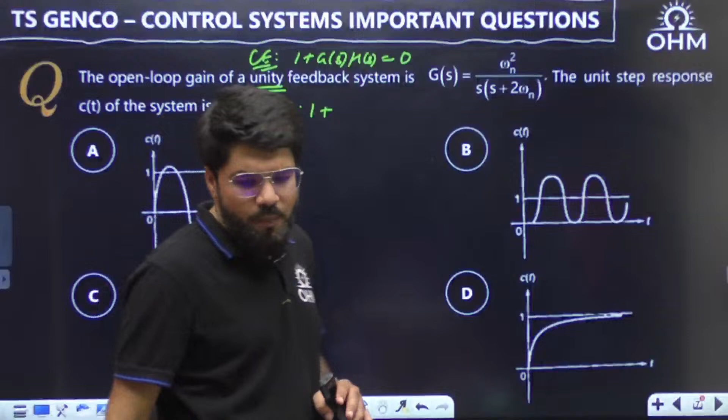G(s)H(s) is known as the open loop gain. So 1 plus G(s)H(s), G(s) is given to you, and H(s) is 1 because it is mentioned as unity feedback. Solving, I will be writing it as s square plus 2 omega n s plus omega n square. And when you compare with the standard equation, s square plus 2 zeta omega n s plus omega n square, everything else is in the same place. So by comparing with the standard form, the value of zeta is zeta equal to 1.

For zeta equal to 1, what type of response does the system have? The response is non-oscillatory and critically damped. For zeta equal to 1 and greater than 1, in both cases it is non-oscillatory, and zeta equal to 1 represents critically damped, where the system reaches equilibrium as quickly as possible. Correct answer is D. The type of response in B corresponds to zeta equal to 0. This is undamped. This one is negatively damped.

So A and C are for negative zeta. I will mention it for your revision. Option C will be the case when zeta is less than -1. When zeta is between -1 and 0, the type of response you obtain is A. B is for zeta equal to 0, the undamped case. And zeta between 0 and 1 is the underdamped case. So the correct answer for this question is option D, corresponding to critically damped, zeta equal to 1.

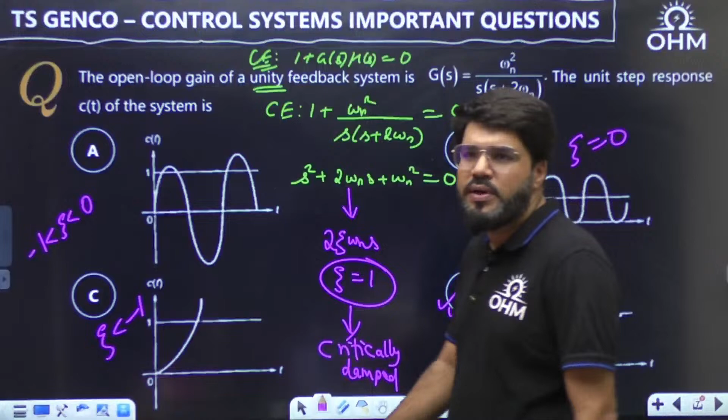Let's be ready for the next question. Two unity feedback systems A and B with open loop transfer functions GA and GB are given. Which of the following statements is correct? It's about comparing which has higher or lower overshoot, and which has lower, higher or equal settling time. So it is a comparison of two parameters, overshoot and settling time. Let us revise the important points here.

For the previous question, many of you, like Durga Prasad, Ashok, Arvind, Rajendra, came up with the answer D.

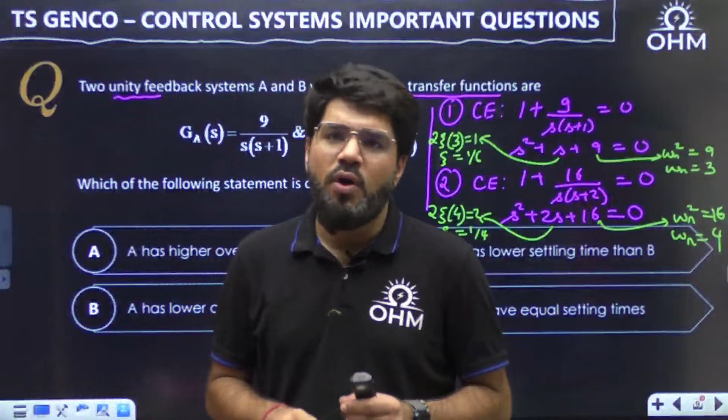So, dekho, now if I compare both, for the first one, zeta is 1 by 6, omega n is 3. And for the second one, zeta is 1 by 4, correct? And omega n is 4. Now, overshoot. What is the relation of overshoot with zeta that you should know?

If I write down the overshoot formula, it is given by e power minus pi cot phi into 100 if I write in percentage, or this is also written as e power minus pi zeta upon under root 1 minus zeta square into 100. Now dear, you should not use the formula to calculate overshoot, but you should remember that with increasing zeta, this overshoot decreases. If zeta is higher, overshoot is lower.

So now for which of the systems is zeta higher? Definitely 1 by 4 is higher than 1 by 6. Zeta 2 is greater than zeta 1, and hence I can say that the overshoot for the second system will be lesser than that of the first system. So second ka less, first is having higher overshoot. So A has higher overshoot, option number A correct. Definitely then others should not be correct, but still let us check.

What about the settling time? Now dear, what is the settling time formula? Settling time is given by 4 by zeta omega n for underdamped system. Both of the systems are underdamped. So settling time is 4 by zeta omega n for underdamped systems, correct? So now for the first one, what is the settling time? Do I need to calculate, or let us only compare zeta into omega n?

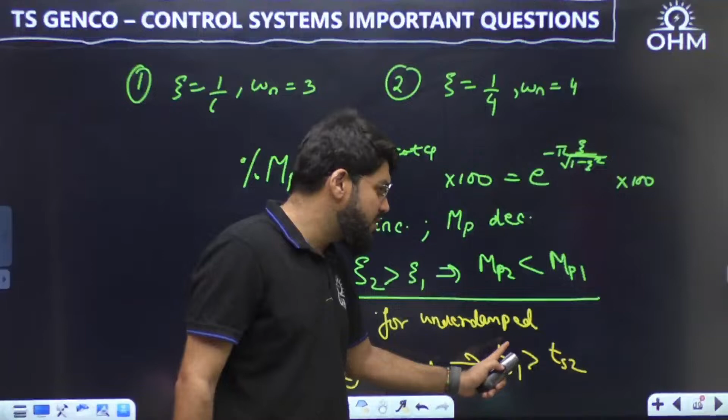So whose settling time is higher? First zeta omega n is low, so settling time for the first one will be higher than that of the second one. Zeta omega n is in the denominator, na? Wherever zeta omega n is lower, the settling time will be higher. So the first system has higher settling time, not lower, and they don't have equal. So that is why C and D are the wrong answers.

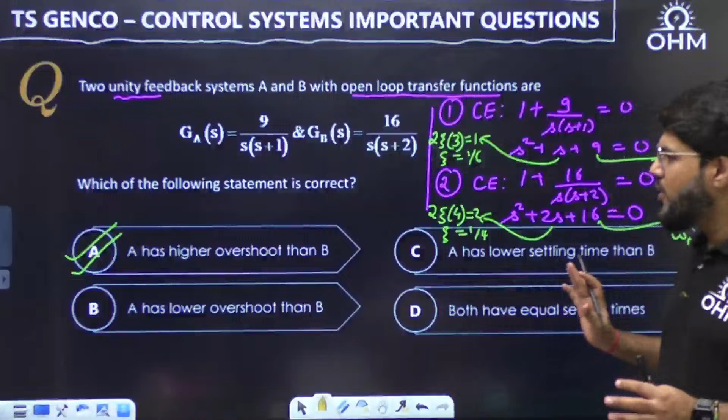Everybody okay with this calculation? Yes, Prabhavati also says answer A. Correct. Answer number A. Anyways, these are MCQ questions only in Genco, so any one option correct. So we got A correct, but still I have cross-verified the settling time also. Clear everybody?

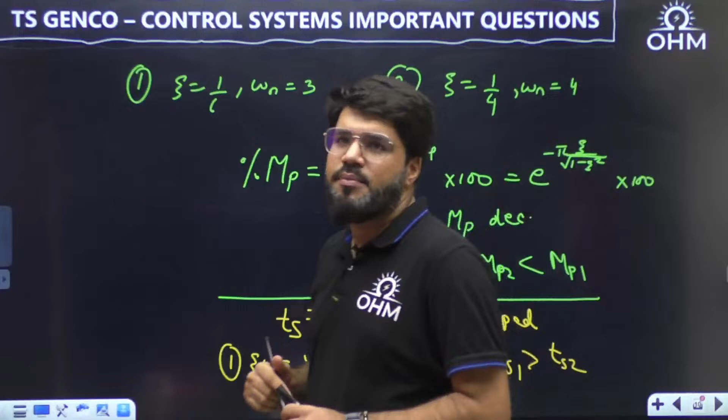Settling time is 4 by zeta omega n for underdamped, and both are underdamped because zeta is less than 1, for any zeta between 0 to 1. This is the settling time formula.

Correct. Next question, dear. A second order system with a 0 at -2 has its poles at -3 plus j4, -3 minus j4 in the s plane. The undamped natural frequency and the damping factor of the system respectively are... Sorry guys, this is not damping factor, this has to be damping ratio. Please correct this question. It has to be the damping ratio.

So let's check it out. Now see, second order poles. The poles are in general given by the formula minus alpha plus minus j omega d, or minus zeta omega n plus minus j omega n under root 1 minus zeta square. We know that zeta is the damping ratio and omega n is the undamped natural frequency.

This term alpha, which is zeta into omega n, is known as the damping factor, and this omega d is the damped frequency of oscillation.

Hi, good evening, Aruna. So Pratyusha says answer is D.

Let's check it out. Now a very simple comparison you can have. The poles given to you are -3 plus or minus j4. That means alpha, which is the product of zeta and omega n, is 3, and omega d, which is omega n under root 1 minus zeta square, is given as 4. Two equations and two variables, so you can find both values, but you can do something even more easily.

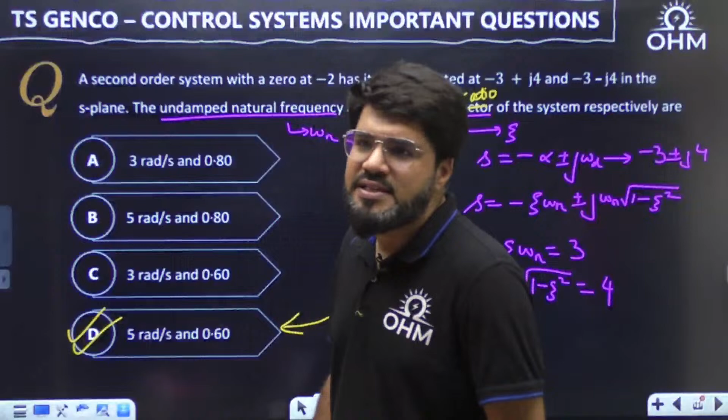Correct, Himanshu. Lal Kumar and Ashok said B. No, just check it out, it is D only. 5 into 0.6 will be 3. So only option D satisfies, and hence there is no need to check the exact values of zeta and omega n; although you can find them, it's not required. Hope this approach is clear to you.

Next one. Consider the open loop transfer function 5s plus 1 upon s square, s plus 5, s plus 12. Correct, Ashok Kumar. Find the steady state error due to unit parabolic input. So what is the type of the system? It should be unity feedback, so let's consider unity feedback with 5s plus 1 upon s square, s plus 5, s plus 12.

This corresponds to type 2 because of s square, the number of poles of G(s) at origin for a unity feedback system. Whenever the system is type 2, what are the standard results? Whether it is type 0, type 1, or type 2, all standard results must be known to you.

For type 2, the steady state error for step input is 0. For ramp input, again 0. For parabolic input, it is a non-zero finite value given by 1 upon Ka, where Ka is known as the acceleration error coefficient.

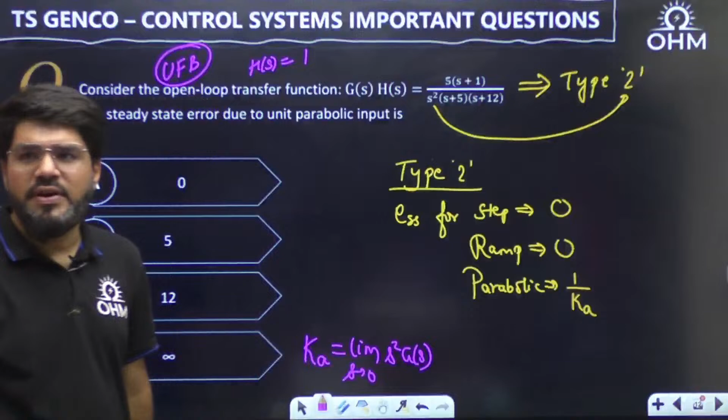Now what is the value of Ka? Ka is given by the limit of s tending to 0 of s square G(s), for unity feedback, taking H(s) equal to 1. So this is limit s tending to 0 of s square into G(s), and I will place the value of G(s), 5s plus 1 divided by s square, s plus 5, s plus 12.

Okay, so s square cancel. Now put s tending to 0. So this is 5 into 1 upon 5 into 12, that is 1 by 12. So what is the steady state error? Reciprocal of this, and reciprocal of this will be equal to 12. Answer is C. Okay, so yes, correct answer.

Himanshu, Ashok, Lal Kumar, Pratyusha, Anil Kumar, Monica, Sushma, Hari. Okay, so all being interactive. Yes, guys, be interactive and keep solving. It is almost your end game, your end stage of preparation going on, and this is really the time where you should be active in solving enough number of questions, undoubtedly. Just a second. Yeah.

Correct. So let's move ahead to the next question. A unity feedback system. What is given to you? G(s) is K(s + 2) upon s(s + 4)(s + 9). What is the value of K to yield 10% error in the steady state? Now let me specify some more things in the question, which is even more obvious. See, what is the type of the system given to you? This time it is type 1, s power 1.

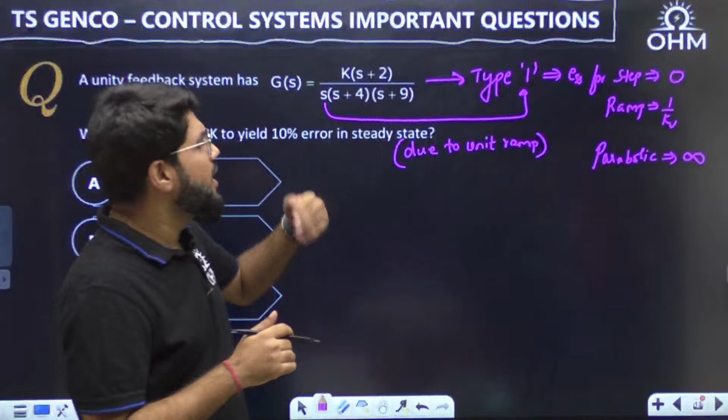So there is a 10% error, finite error given in steady state. So this has to be due to unit ramp input. Otherwise, the answer would be either 0 or infinity. It will only give a finite non-zero error for unit ramp input, otherwise not. So of course, we'll take it as unit ramp input.

So now, the steady state error is 10%, that is 0.1. And steady state error, as I mentioned, is 1 upon Kv, which is 0.1, and hence Kv has to be 10. Further, what is Kv? Kv is given by limit of s tending to 0, s into G(s). Correct, guys? That is the value of Kv.

What is the G(s) given to me? K(s + 2) divided by s(s + 4)(s + 9). So s cancelled and this becomes K, then s tending to 0, so into 2, by 4 and 9. Overall it is turning out to be K by 18. So if I solve this separately here, see what is given to me. Steady state error is 0.1 and that is 1 upon Kv.

Sorry, already I have written this calculation, let us directly use Kv. Kv is 10, and Kv is K by 18. So what is K? 180. What is the value of K? 180. Correct answer is option number B.

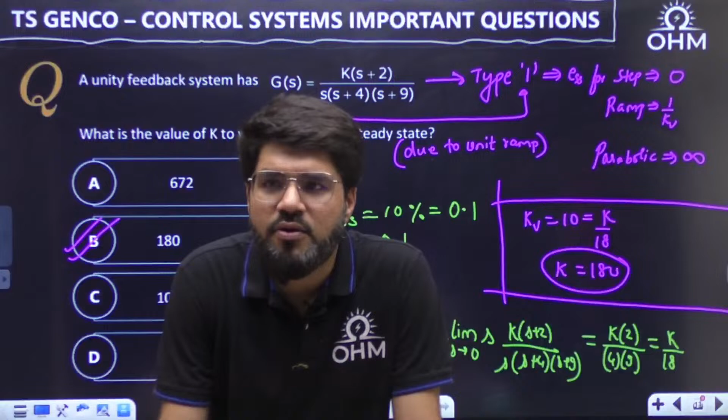Yes, correct answer Himanshu, Pratyusha, Hari, Lal Kumar, Ashok, Prabhavati, Mohan. All right. Option number B is the correct one.

Let's get moving ahead to the next question. Here it is. Which one of the following statements is correct for the open loop transfer function?

Which one of the following statements is correct for the open loop transfer function G(s) = K(s+3)/(s(s-1)) for K greater than 1? Okay, K is given to be greater than 1. Open loop system stable, closed loop system unstable. So the options are checking what? Open loop stable or closed loop stable, both stable, both unstable. What is the story here?

Okay, so the open loop transfer function is already given to you, G(s). Of course, H(s) is 1. If the open loop transfer function is only G(s), then H(s) is 1. Now, what is that open loop transfer function? K(s+3)/(s(s-1)). And what are the open loop poles? You should always remember OLP, I call it open loop poles. What are open loop poles? Poles of the open loop transfer function.

The poles of the open loop transfer function are 0 and 1. That is just obtained from the denominator. And very clearly one of the open loop poles is in the RHP. For any transfer function, if there is a pole in the RHP, that represents an unstable transfer function. So definitely the open loop is unstable. Now, what about closed loop? Write down the closed loop transfer function or the characteristic equation, any one of them.

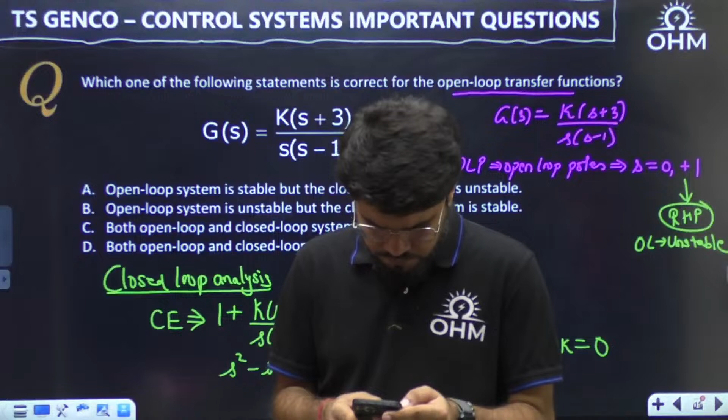Now, it is a second order characteristic equation. Think, do we need to go to Routh-Hurwitz, or can we say something directly? Just a moment. Do we need to go to Routh-Hurwitz? Come on, tell me. Just a moment. Yeah, let's come back. So do we need to go for Routh-Hurwitz?

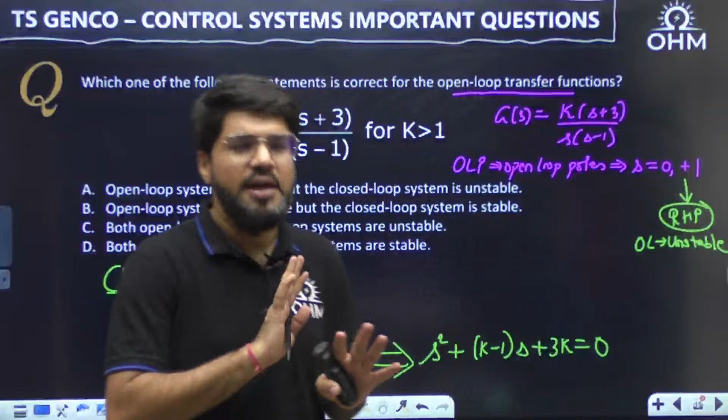No. Yes, very good, guys. We don't need Routh-Hurwitz. If it was higher order, third or fourth, we can go for Routh-Hurwitz. Even for third order cubic we have shortcuts, but generally for higher order we need Routh-Hurwitz. Here, only coefficient signs are important. For a second order system, if all coefficients of the characteristic equation are of the same sign, then the system is stable. Now, what is the sign of K-1? Given K greater than 1, this factor K-1 is definitely positive.

So this coefficient is 1, K-1 is also positive. K greater than 1 means K is positive, so 3K is also positive. All coefficients are of the same sign, and it is second order, so the system is stable. Because it is second order, no RH required. Hence the closed loop is stable, open loop unstable. The answer to be marked is option B.

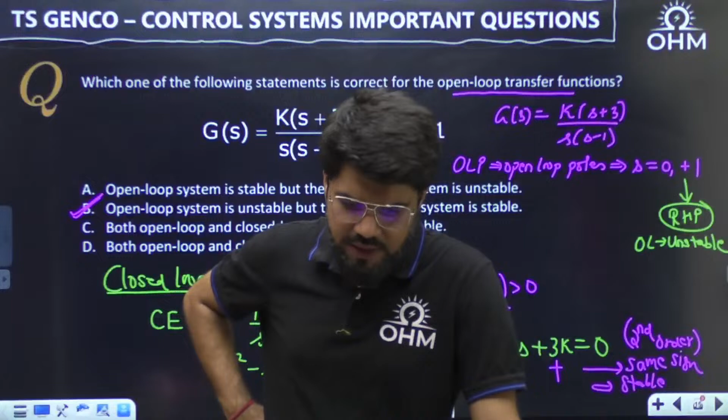Cool. Let's go to the next one. Here it is. The characteristic equation of a control system is given to you. Which of the following is one of the symmetric root pairs of the system? Symmetric, and that too pure imaginary roots. Now all of these options are pure imaginary in nature. How are we going to approach this question?

The characteristic equation is fourth order; of course you can't solve fourth order, even with a calculator. The options are given to you as pure imaginary pairs. Pure imaginary roots of a characteristic equation will only come due to the presence of an auxiliary equation, and an auxiliary equation can only come whenever the Routh array has a row of zeros, ROZ, which means row full of zeros. And this is what the auxiliary equation is.

Correct? This is what is the auxiliary equation. This is what is the auxiliary equation. Chalo. Okay, so some answers have started coming up. Himanshu and Hari say it is C.

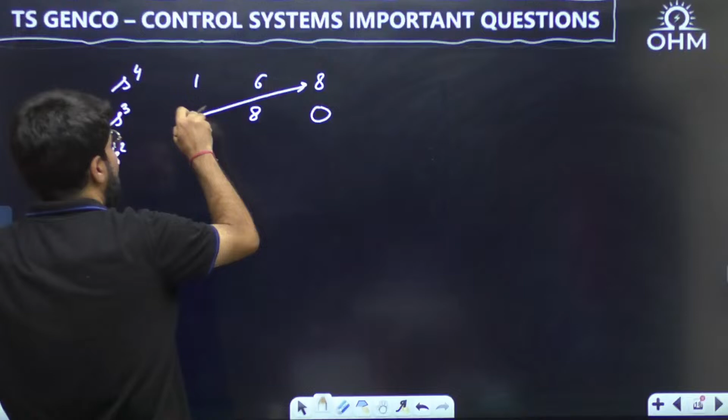So two rows are exactly identical, and that is why when you solve for the next row, yes, the row of 0 will definitely be coming, Rajiv. When you solve for the next row, see, 2 into 8 minus 2 into 8, definitely 0. The entire column is 0, so 2 into 0 minus 2 into 0, 100% 0. The last element of a row is always 0, and this is what I am telling you.

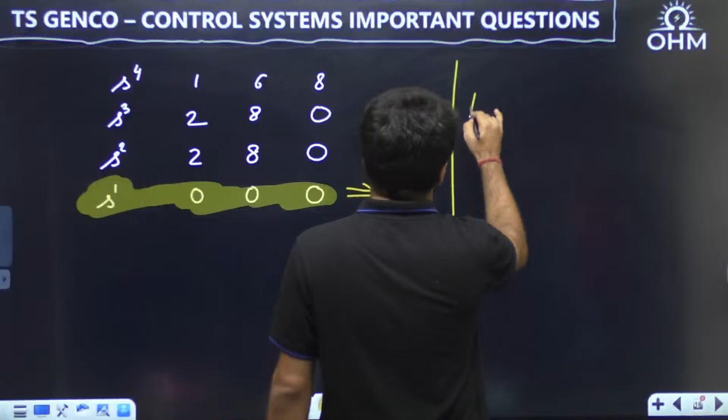This is what I am calling a row of zeros, correct? This is the row of zeros for me. Now whenever there is a row of 0, we will form the auxiliary equation. The auxiliary equation is formed from the row which is above the row of 0.

So that leads to which equation? The equation in the s square row, quadratic, with coefficient 2, and then the alternate coefficient, so 8 s power 0. If this is s square, the next term will be s power 0. So simply 2s square plus 8 equal to 0, or if I cancel 2, s square plus 4 equal to 0, s square will be minus 4 and s will be plus minus j2. This will be the imaginary pair. Plus minus j2, answer is C.

But let us continue and do some more analysis here. Answer is option C anyway. So yes, correct answers: some of you have given C, like Himanshu, Hari, Durga, Lal Kumar, Mohan, Vinela, Anil, Ashok. Correct, answer is option C.

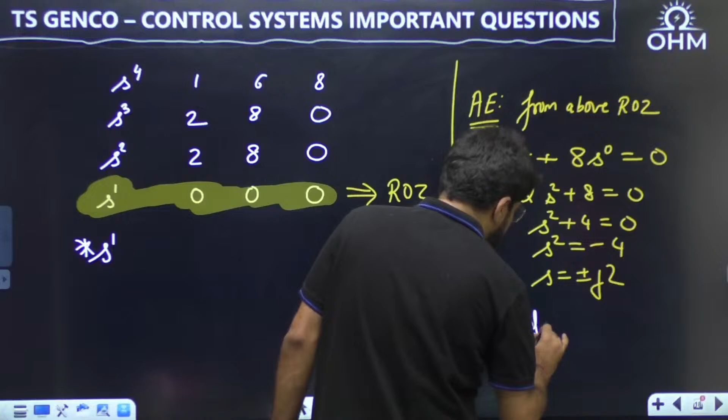But generally when we talk about stability analysis, we continue and complete the Routh array. So what do we write next? Next we write the modified s power 1 row. How do you write the modified s power 1 row? By taking the derivative of this auxiliary equation. When you take the derivative of this auxiliary equation, it becomes 4s equal to 0.

So what is the s power 1 row? What is the coefficient of s power 1? 4, and then 0, 0, no other coefficient. And then the last row, s power 0. When you are forming s power 0, which two rows will you use? The new modified s power 1 and the s power 2, of course. So this is 4 into 8 minus 0, divided by 4, it's going to be 8 here. The entire column is 0, so the answer is 0. Last element anyway 0, this is s power 0.

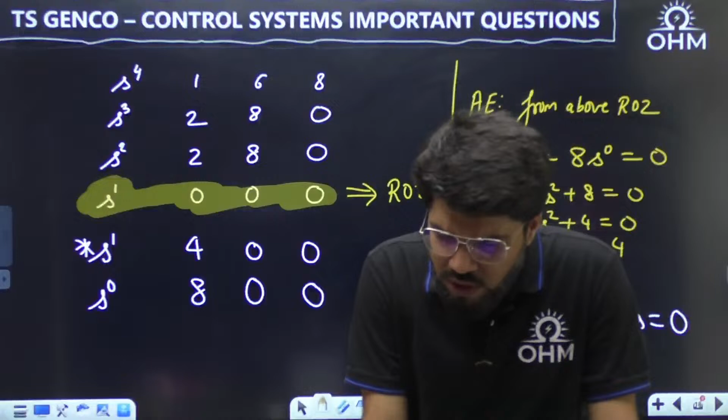So if I have to do the complete analysis, how many RHP roots, how many LHP roots, etc.? Let's quickly revise that also. Anyways, the answer is option C, plus minus j2. But how many RHP and how many LHP roots?

So see dear, there is no sign change in the first column. When I look into the first column, there is no sign change. That means there is no RHP root. So how many RHP roots? 0. Then how many LHP? For that, we know the j omega axis roots also.

By this auxiliary equation we have got that there are two roots on the j omega axis, plus minus j2. There is a complex conjugate pair here. So how many on the j omega axis? 2. So how many are left for LHP? There are total 4 roots, because it is a fourth order equation. Out of the 4, 0 on RHP, 2 on the j omega. So how many LHP? 2.

What is the comment on the stability of the system? If there is even one RHP root, the system will be unstable. But there are no RHP roots. Still the system is not stable, because it has a pair on the j omega axis, which makes it marginally stable. For it to be purely stable, all roots must be in LHP. If there is a pair on the imaginary axis, that makes it marginally stable, and if there is even a single RHP root, the system is unstable. So the system is marginally stable.

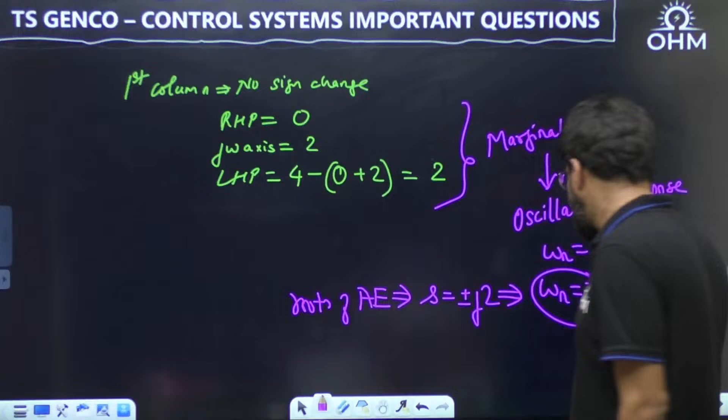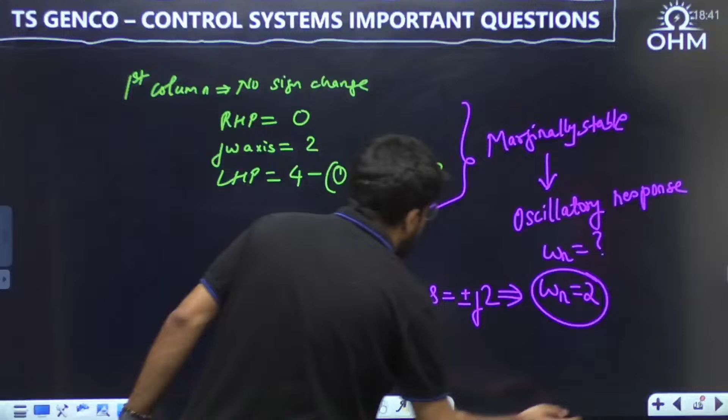Clear? Also, please take a note. Be very careful. Here you got RHP 0, j omega 2, LHP 2, and I called the system marginally stable. But suppose there was one sign change. Then RHP 1, j omega 2, so LHP is 1. Rest everything remains the same, but let us assume you got one RHP root.

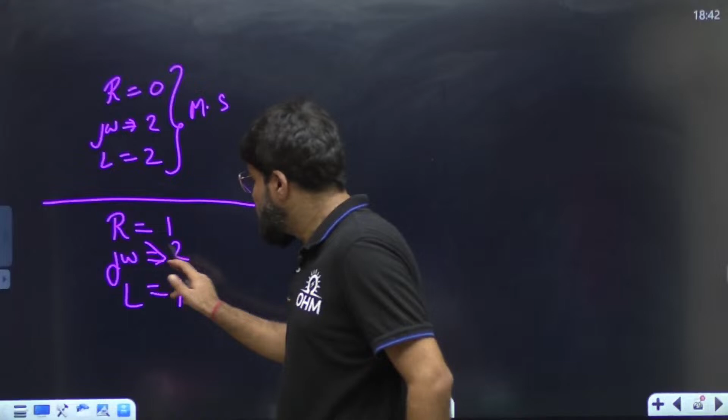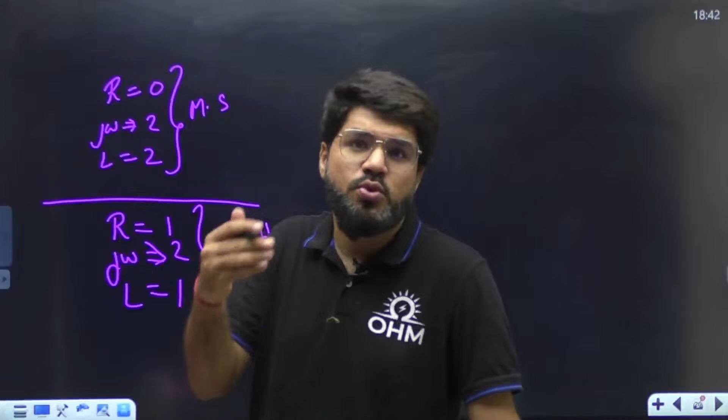If you had one RHP root and still two j omega roots, still a pair of imaginary roots, will the system be still oscillatory? Will it be still marginally stable? No. Even with a single RHP root, the system is clearly unstable. So please don't talk about any frequency of oscillation here. Frequency of oscillation is associated with an oscillatory or marginally stable system, and for that you should have a single pair of j omega roots with nothing in the RHP.

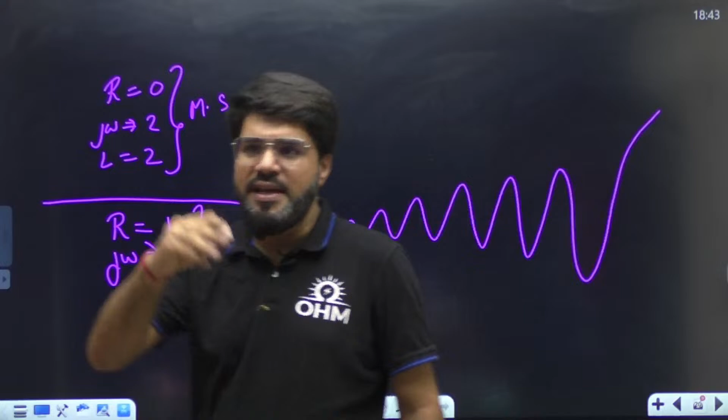If there is one RHP root, it is unstable. The response is negatively damped. The output will not only oscillate but will keep on increasing, and it will become unbounded after a certain point of time. So that is how it is going to be.

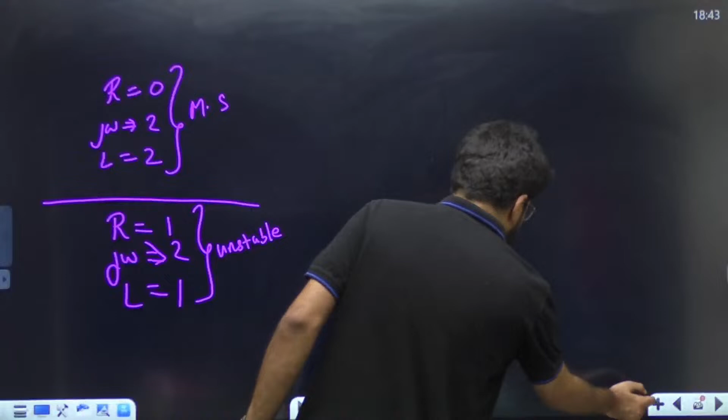You can even follow this shortcut for the auxiliary equation. There is one more way, dear. Suppose I have the auxiliary equation and I have the characteristic equation. What is the order of both?

Okay, what is the order of both? See, always remember one shortcut. Do you need to solve this auxiliary equation every time to find its roots? Not required. No, it's not actually required to solve it every time. Here it was solvable, and here I needed to solve it because I needed to find the roots. They were asking about the imaginary roots only, that complex pair, that imaginary pair.

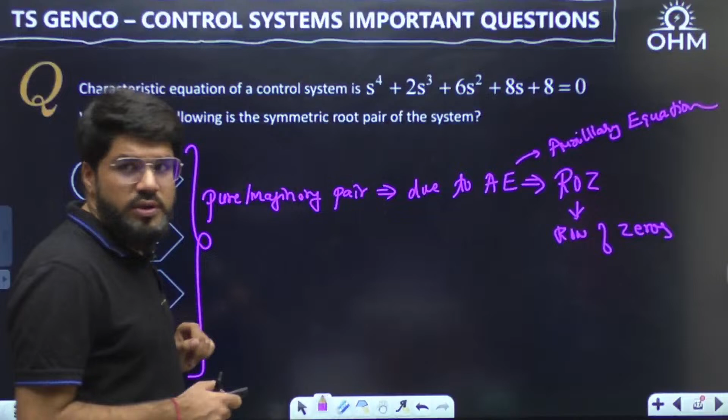But if I only want to comment on how many LHP, how many RHP or how many j omega roots, it's not necessary to solve the auxiliary equation. What you can do is just write down the order of the auxiliary equation. Here it is second order, and the overall characteristic equation is fourth order. Now, what is the shortcut for the auxiliary equation?

The shortcut is that for any auxiliary equation, because it contains only even powers, the number of RHP roots is equal to the number of LHP roots, which is equal to the number of sign changes below the auxiliary equation. For any auxiliary equation the roots are symmetric; the number of LHP and RHP roots are equal.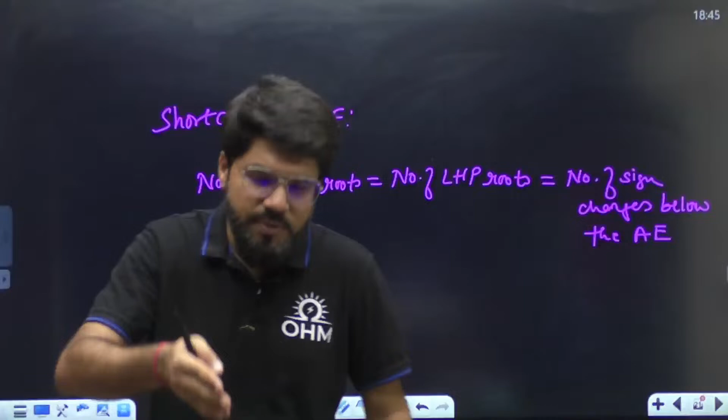And how many RHP roots? The RHP roots are represented by the number of sign changes in the first column, but below the auxiliary equation, because I am focusing only on the RHP roots of the auxiliary equation. So where is my auxiliary equation? Here. It starts with the S square term. I don't have to bother about anything above, because I'm only interested in the roots of this auxiliary equation, which starts with the quadratic.

So 2s square plus 8 equal to 0. How many sign changes below it? 0. So how many RHP roots and how many LHP roots? They are always equal, and both of them are 0 here. The auxiliary equation order is 2, with 0 in the RHP and 0 in the LHP. Nothing on the right, nothing on the left, so both roots are on the j omega axis.

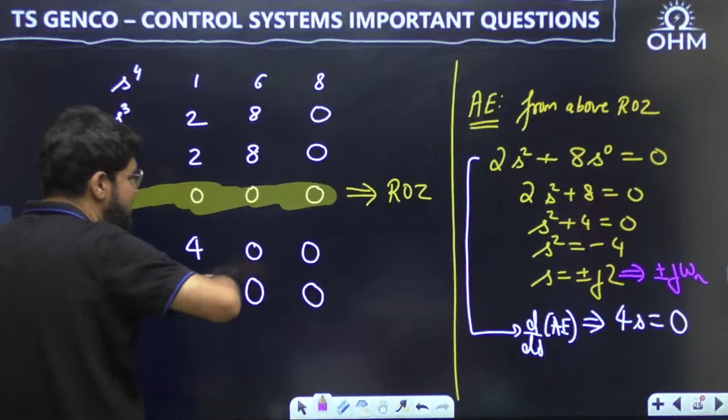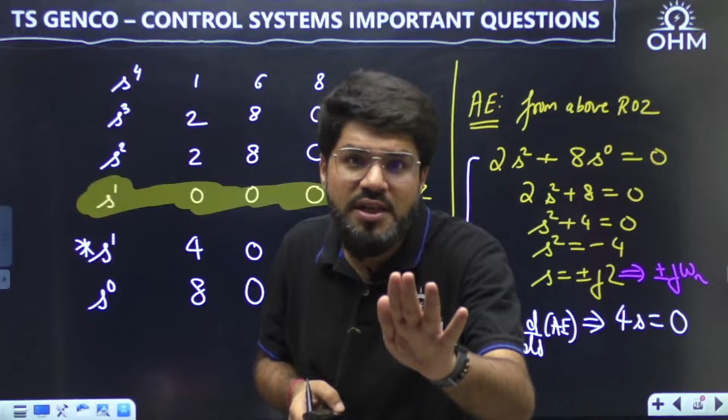Now coming to the characteristic equation, how many RHP roots? For that you have to see the number of sign changes in the entire first column. The number of RHP roots is always given by the sign changes in the first column. For the overall characteristic equation, take the overall sign changes. If you want the RHP roots only for the auxiliary equation, just look below the part where the auxiliary equation started.

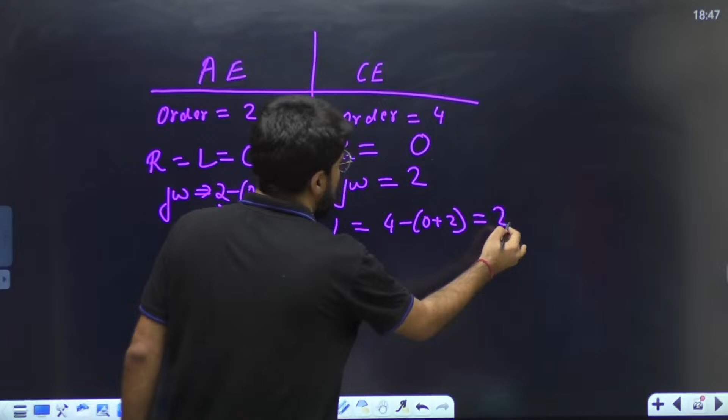So here, how many RHP roots? Even overall, there are no RHP roots. How many j omega? That is always decided by the auxiliary equation part, so 2. How many LHP? That is 4 minus (0 plus 2), which is 2. So here you don't need to solve the auxiliary equation. The shortcut: the number of RHP roots and LHP roots of the auxiliary equation will be equal.

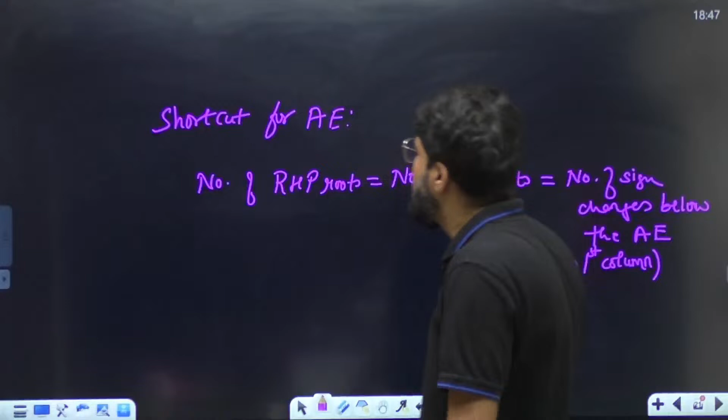Let me tell you one more important point; with this question, let us revise some important points. Whenever a row of zeros comes in any characteristic equation when you are solving through Routh-Hurwitz, there are definitely the following possibilities of the roots. There are three possibilities, and I will tell you all three.

Number one scenario, when the roots are pure imaginary, that is seen in the previous question. Number two, roots are real, of the form plus x minus x, equal magnitude but opposite sign. This is of the form plus jy minus jy: roots are complex conjugate lying on the imaginary axis, that is a pure imaginary pair. This is plus minus x. Next possibility is a quadrature, of the form x plus jy, x minus jy, minus x plus jy, and minus x minus jy.

All the roots are always symmetric with respect to origin. Plus y above, minus y below. Minus x left, plus x right, equal distance. Even if you calculate the distance of all these four with respect to origin, it will be the same, under root x square plus y square. Whenever there is a row of 0, the roots of the auxiliary equation are symmetric with respect to origin.

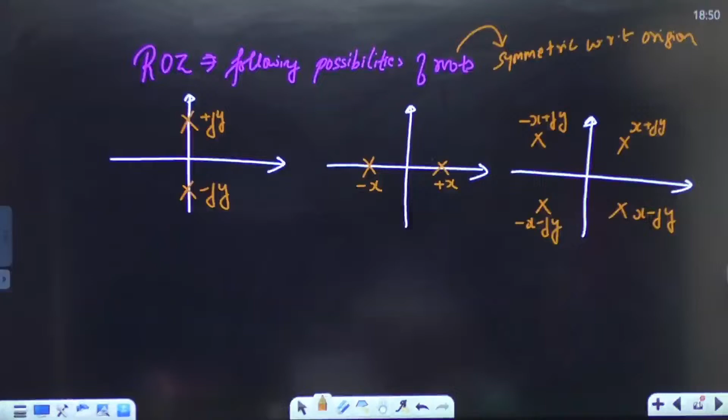Next question. The characteristic polynomial of a feedback control system is given: S cube plus KS square plus 9S plus 18. When the system is marginally stable, what is the frequency of sustained oscillation? This time you are given a cubic characteristic equation. What is the shortcut for a cubic characteristic equation? When you have the characteristic equation of the format AS cube plus BS square plus CS plus D, cubic is an important and repeated question, so you should know it directly.

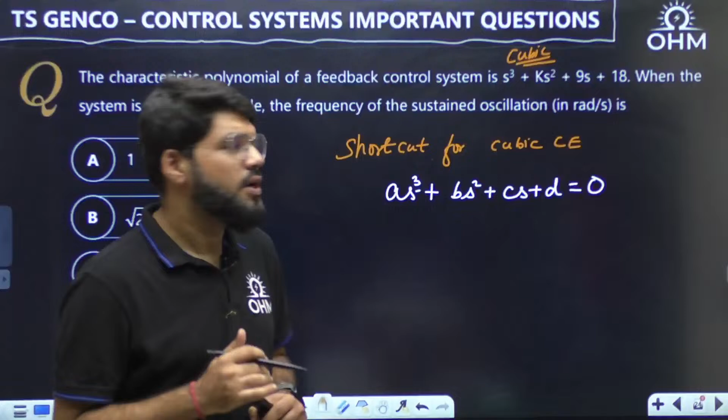In around 2 to 3 months, exact cannot be said, but around 2 to 3 months this much time will be there, Ashok.

So AS cube plus BS square plus CS plus D. Now what is the condition for the system to be marginally stable? When I'm telling a shortcut, it is actually coming from RH only. It is a simple one. A and C, alternate coefficients, and B and D here. Then S power 1: you will write BC minus AD divided by B, last element 0. S power 0: X into D by X, so you'll be left with D.

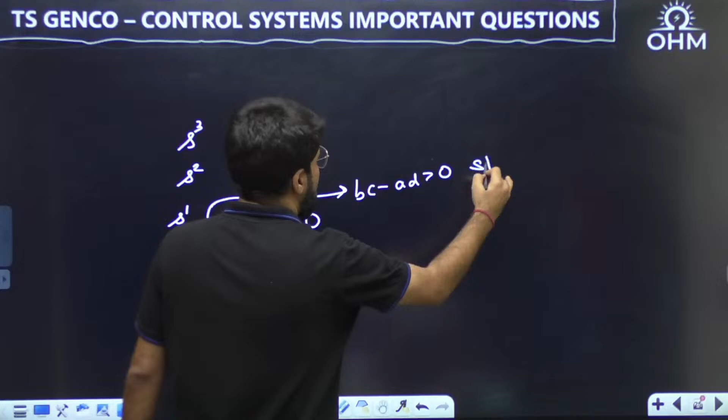Of course I'm assuming all coefficients A, B, C, D are positive, that is the necessary condition. What else has to be positive for stability? BC minus AD must be positive for stability, because if this is positive, all coefficients are of the same sign, no sign change, no RHP root. That is what will be required for stability: BC minus AD, inner terms and outer terms.

When BC is greater than AD, the system is stable. When BC is equal to AD, the system will become marginally stable, because you will have this term 0, a row of 0, and the marginally stable condition will come. And when BC is less than AD, a sign change will come. Sign change means RHP roots will come and the system is unstable.

So this product BC and AD will matter here. We call BC the product of inner terms or product of means, and A into D the product of outer terms or product of extremes.

Yes, definitely another session is coming up for signals and systems also, in the next one, Anil, definitely.

So this is BC and this one is AD. Chalo, cool. Let's move ahead to the next. This is BC and this one is the AD.

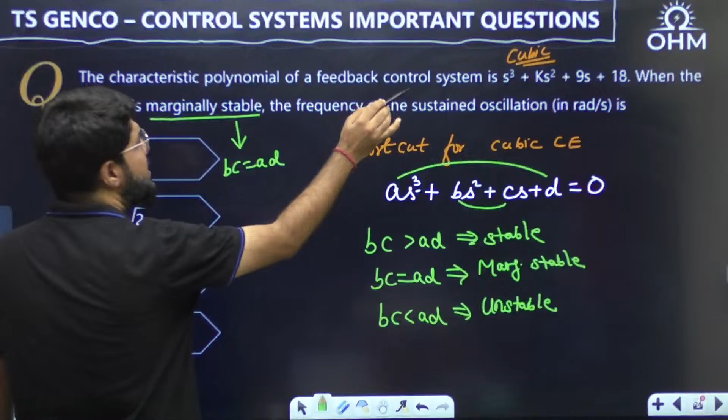Let's move ahead. Okay, so for this question, what is the condition? When the system is marginally stable, we need BC equal to AD. What is BC here? 9 into K. And what is AD here? AD here is 1 into 18, that is 18. So for K equal to 2, system is marginally stable.

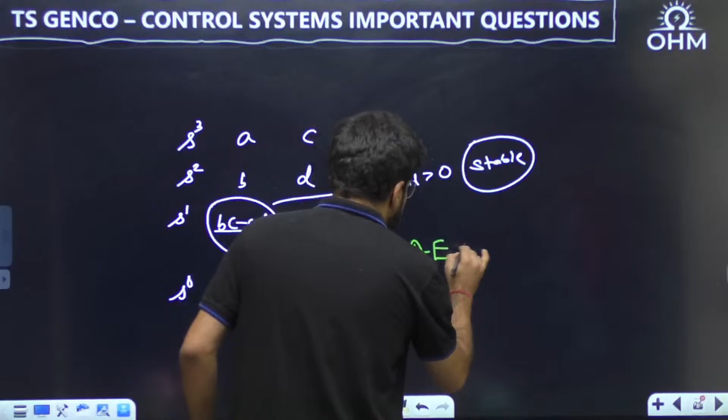But I don't want the value of K, I want the frequency of oscillation. Marginally stable means system is oscillatory. So what is the condition for marginally stable? BC is equal to AD. Now what is the auxiliary equation? See, how to write down the auxiliary equation by the shortcut first. So dekhna yahan pe please.

Marginally stable system leads to oscillatory system. And oscillatory system means it will have some auxiliary equation. Auxiliary equation is always an even polynomial. It starts from s square or s power 4 like that. Here s power 4 is not possible, so it will start with s square only. So it will be Bs square, and every auxiliary equation can contain only even powers. So s square and then D s power 0, the constant term.

So for a marginally stable system, how do you write down the auxiliary equation? One way is you write down the Routh-Hurwitz, but without the Routh-Hurwitz, be logical. Auxiliary equation always starts in an even polynomial, s square or s power 4. Here s square is possible. The coefficient of s square is B, and only alternate terms come up, so Bs square plus D equal to 0. So the auxiliary equation here is Ks square plus 18 equal to 0.

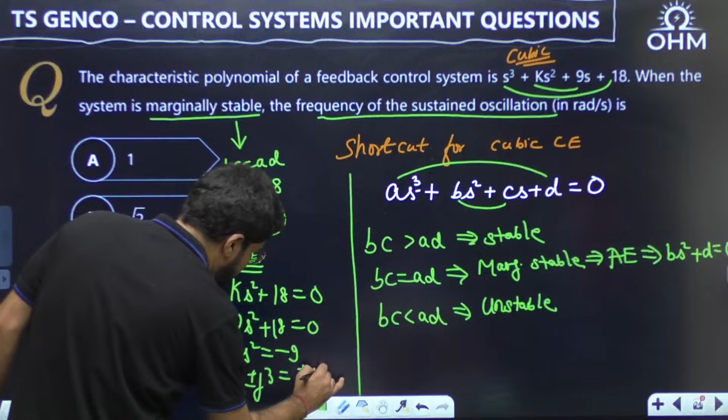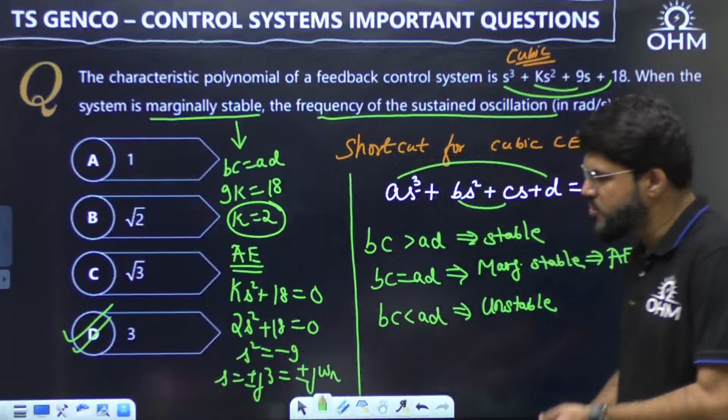What is the value of K? K is 2 now. So 2s square plus 18 is 0. S square will be minus 9, and s equal to plus minus j3. And that is plus minus j omega n. So what is the frequency of oscillation? It is equal to 3. Correct answer is D. Very good. The very correct answer is option number D.

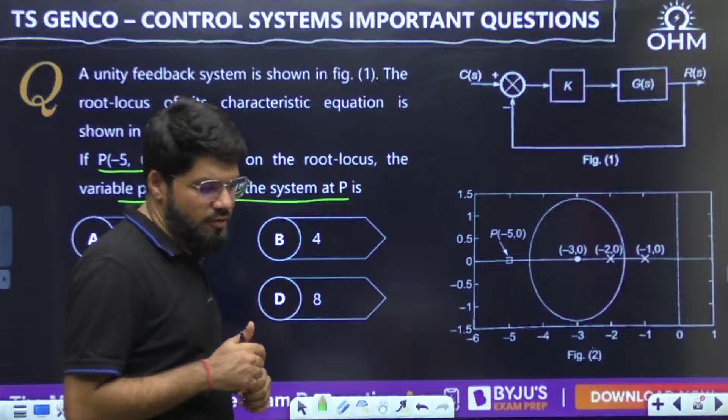When P is a point on the root locus, every point lying on the root locus must satisfy the characteristic equation, and the root locus is given to you. So from the root locus, what can you do? Number one, you can find out the characteristic equation and satisfy P, or the other way around. There are two ways of finding the value of K. Listen to me. Method number one.

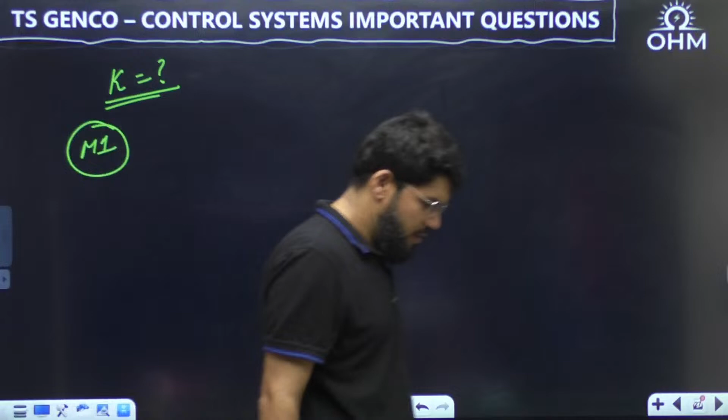Every point lying on the root locus should satisfy the characteristic equation. So can you find out the characteristic equation of the system from here? For the characteristic equation, definitely I need G(s)H(s). So can we find G(s)H(s) from here? Please see. And then I will tell you method number 2, which is even more straightforward. Just allow me a minute, dear.

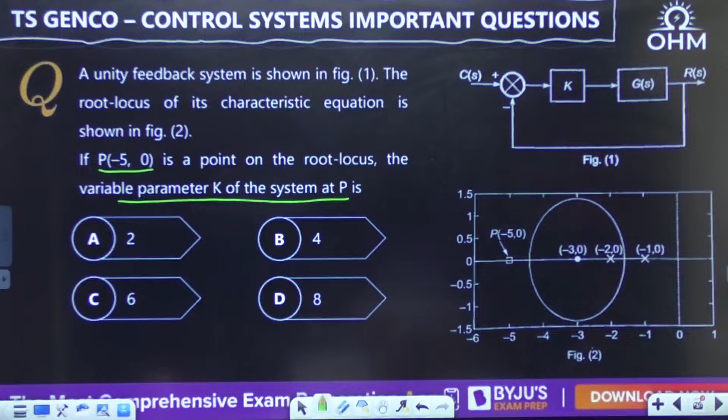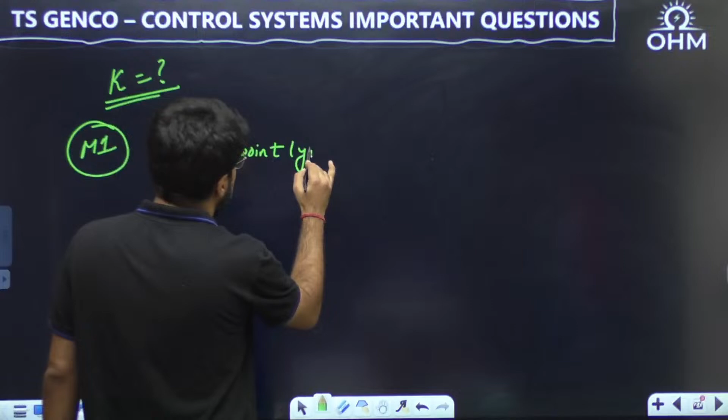Yes. So can we find the characteristic equation? For that I need the G(s)H(s). Okay. So what is method number 1? Method number 1 is: every point which is lying on the root locus must satisfy the characteristic equation. That is 1 plus G(s)H(s) equal to 0.

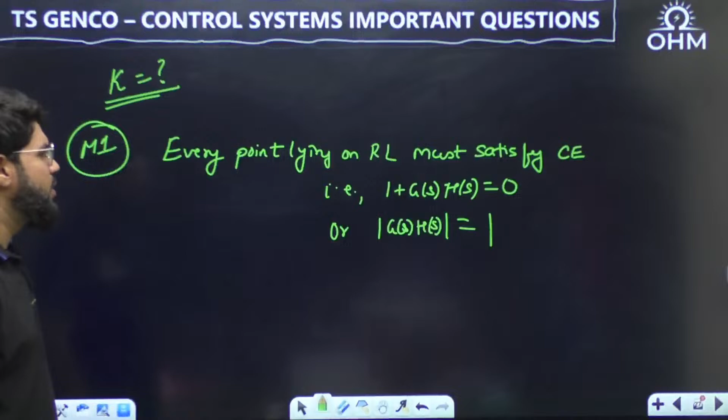1 plus G(s)H(s) equal to 0, or we can also solve by the magnitude condition. Mod G(s)H(s) equal to 1. G(s)H(s) equal to minus 1, so you can also find it by the magnitude. So mod G(s)H(s) equal to 1, and G(s)H(s) here can be found easily, because there is a zero given to you, and there are two poles of the system given to you. This is the zero, this is a pole, this is a pole.

So what is the G(s)H(s) here? It will be equal to some k into the zero. The zero is at minus 3, so I will write down s plus 3 in the numerator. And poles are at minus 2 and minus 1, so in the denominator I will write s plus 1, s plus 3.

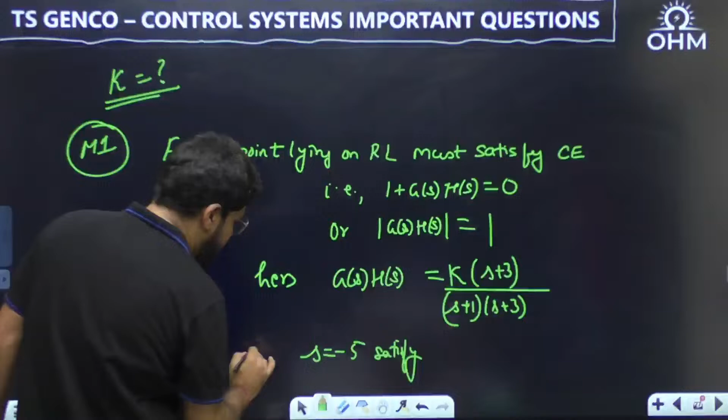Okay, so mod G(s)H(s) equal to 1. Or directly 1 plus G(s)H(s) equal to 0. Satisfy the point P here. What is the point P? Minus 5 comma 0. So s is equal to minus 5, because that is the point P. Put s equal to minus 5 and 1 plus G(s)H(s) should be 0. That is one way; now you can complete the calculation. Second way, simple, direct, I will tell you.

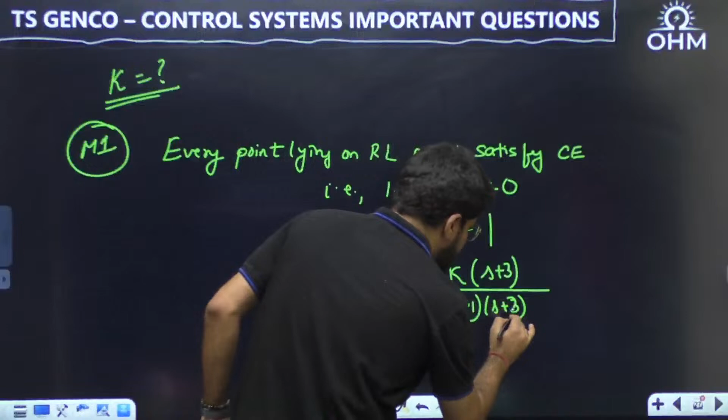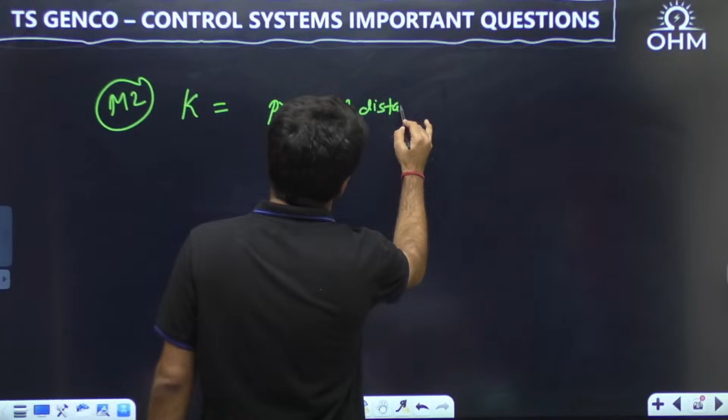Second method. K, by the product formula, is obtained from this only, mod G(s)H(s) equal to 1, or 1 plus G(s)H(s) equal to 0. And sorry, that is s plus 2, typo error, this is 2. The zero was at 3. Now listen to me. The next method: k is also given by the product of distances of the point P. I am talking about some point P. The product of distances of the point P from what?

From all the poles, divided by, and this is a direct method especially when the pole-zero diagram is known to you, the product of distances of the point P from all the zeros. Correct. Product of distances of the point P from all the poles divided by product of distances of the point P from all the zeros. Correct, everybody? So if I have to follow this, then what is the value of k?

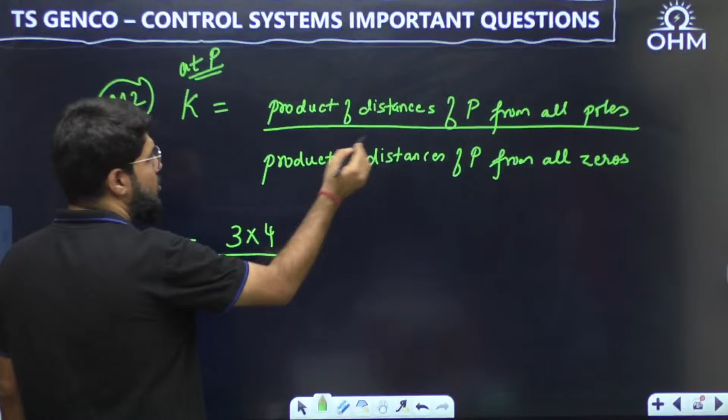So this is the point P. Product of distances with respect to all the poles. Minus 5 and minus 2, the distance is 3. Note down, this distance is 3. Distance with respect to the other pole will be equal to 4. And distance with respect to the zero, minus 5 to minus 3, distance is 2. So 3 into 4, product of distances from poles, divided by product of distances from zeros; there is only one zero and the distance is 2. And hence this answer has to be 6. Everybody okay? The answer has to be 6.

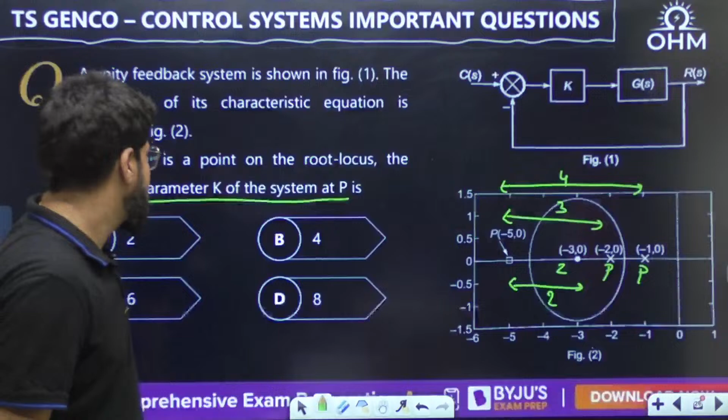So if you know that second technique, you can directly tick mark here. Just look into the geometry. This is my point. Distance from pole 3, distance from another pole 4, so 3 into 4. Now the denominator, distance with the zero is 2, so divide by 2. That's it. Very simple. It becomes an observation question then.

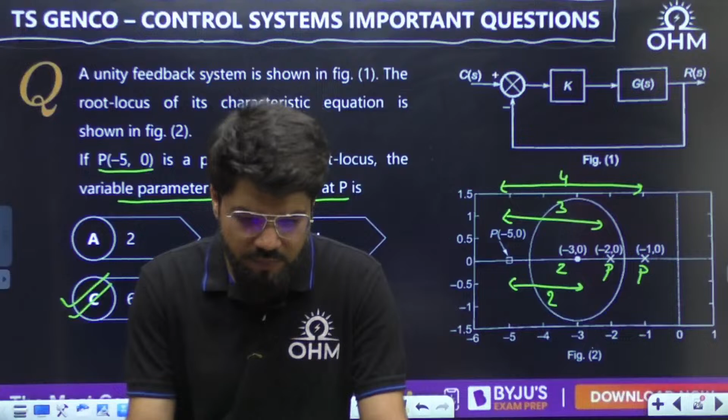Yeah, definitely. Many questions are straight questions, memory based or theoretical or simple numericals, like this also, provided your practice is always good. This is a question which can be solved easily within 1 minute. So up to this level is what is expected. Of course, very few questions can be good also. Be ready for that. Good means not tough, but at least something better than this. That is also a possibility.

Okay, dear. Chalo. Next one. Let's move ahead to the next one.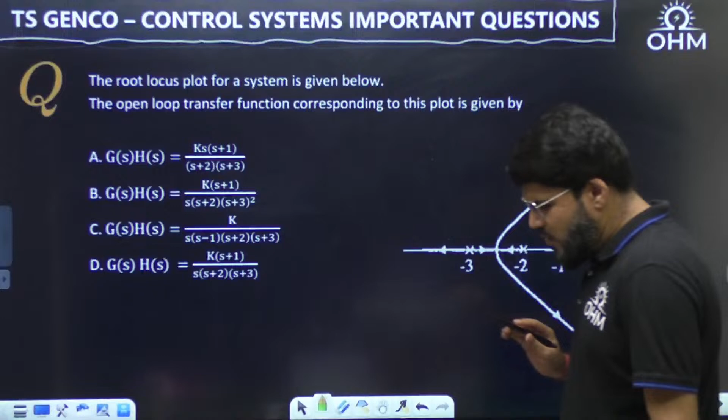So this is only a basic analysis of the poles and zeros, with a simple twist in the question. Have a look into this. Let me highlight the poles and zeros more clearly, maybe it's not that visible. -3 represents a pole location, -2 represents a pole location, -1 is a zero location, and the origin is a pole location. Now just see what can be the possible answer.

So see dear, definitely the answer will have to contain a zero at -1, so the factor is s plus 1. Then there is a pole at origin, so an s term. Then there is a pole at -2, there has to be an s plus 2 term. There has to be a pole at -3, so there has to be an s plus 3 term.

But when you look into the root locus, dear, is this the correct answer? See the arrows. Root locus is existing on both the sides of this particular pole. What is the odd number criteria of root locus? Something you must know.

As per the odd number criteria, root locus will exist on the section of real axis where the forward poles and zeros, I in short call it FPZ, is an odd number. FPZ, forward poles and zeros: poles and zeros when you see to the right, forward.

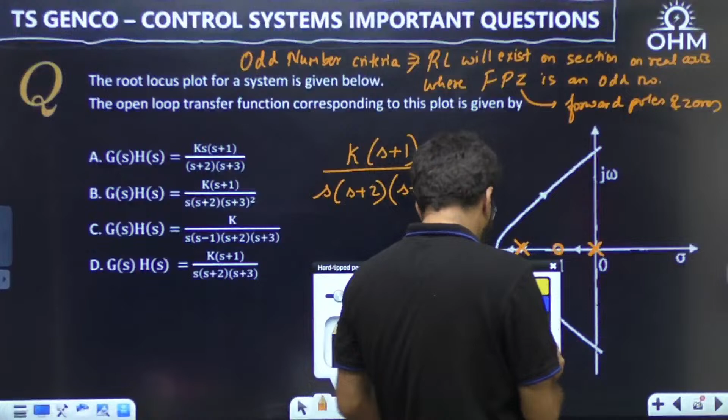So now please see here. When I see the forward poles and zeros on this section, how many? I have one pole. One is an odd number, so root locus is defined here. That is why there is a root locus between 0 and -1. If I see the forward poles and zeros here, there are no poles and zeros, nil, and that is counted as an even number. That is why there is no root locus branch lying here.

Similarly, there is no root locus, no bold line, no arrow here, because when I see to the right, there are 2 poles and zeros. 2 is an even number, so root locus cannot exist on the real axis here. Between -2 and -3 there is a root locus given, starting from -3 and -2, then there is a breakaway condition, etc. How many poles and zeros here? 1, 2, 3. 3 is an odd number, that is why root locus is defined here.

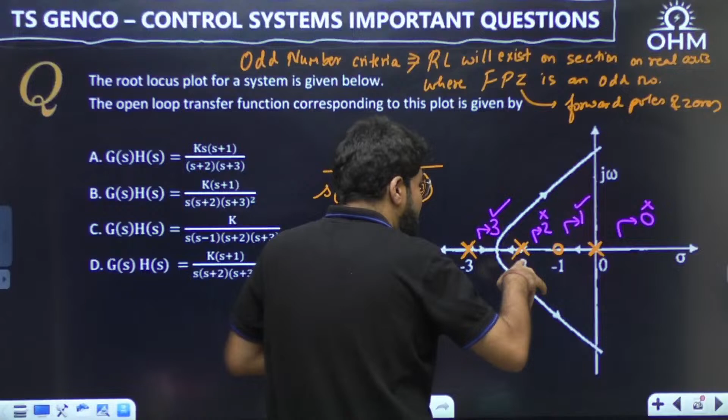Then, when I see the forward poles and zeros from here: 1, 2, 3, 4. These are equal to 4 in number. 4 is an even number, so root locus should not exist here, but root locus is still existing here. It looks like a simple question. You can say the answer is D, but it is not D, because here also root locus is existing and it cannot exist for an even number.

That simply means this also must be an odd number, and at -3 there has to be a double pole, 2 poles at the same location, so that 1, 2, 3, 4, 5 becomes an odd number. Hence our expression should have an (s+3) whole square term. The correct answer is option number B. Done?

So sometimes there can be small twists, and you should be ready for handling those small twists.

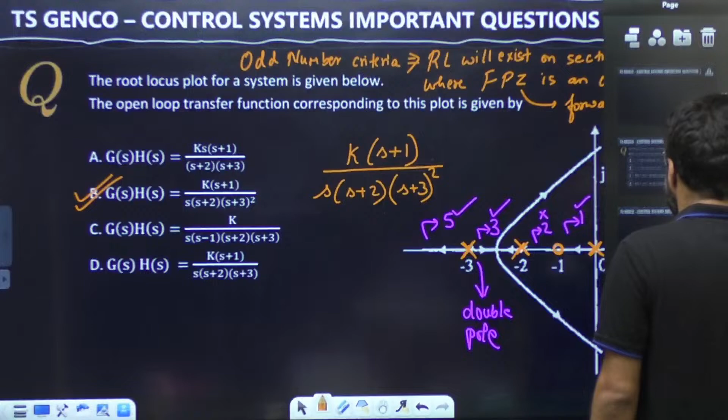Okay, now first take up this question. The transfer functions of two compensators are given below: 10(s + 1)/(s + 10) and (s + 10)/10(s + 1). Which of the statements is correct? Which is lead, which is lag? Very simple analysis.

The transfer function in which there is zero dominance is a lead compensator. The transfer function in which there is pole dominance is a lag compensator. So for C1, what is the pole and zero? Let me write down the zero here: -1. And what about the pole? -10.

So which is dominant? Zero is dominant. The dominant term is the one which is closer to the origin. So this is known as zero dominant, and hence this one will be a lead compensator.

Now coming to C2. What is the zero term? s + 10 = 0, so s is -10. And what is the pole term? s + 1 = 0, so s = -1. Here, which is dominant? Here the pole is closer to the origin. Zero is away, pole is closer, so this is pole dominant.

Very simple way of identifying lead and lag. This one is having pole dominance and hence is a lag compensator. Okay, so lead and lag.

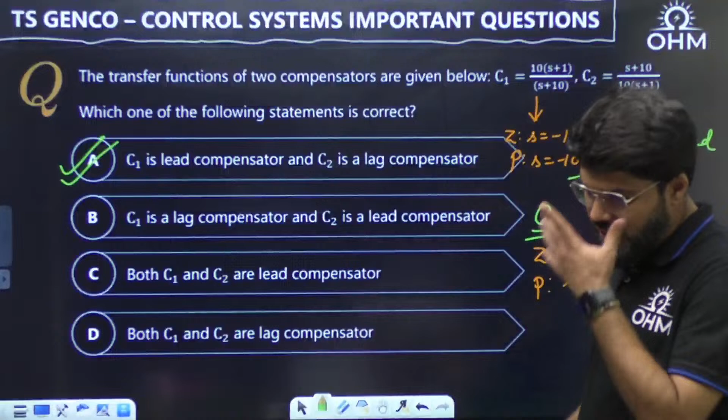Chalo, let's move ahead to the next question. Now a lead compensator is given to you: (1 + 0.12s)/(1 + 0.04s) can provide a maximum phase shift of? If you relate the pole and zero, of course it is going to be zero dominant. No need to check, they have mentioned it is a lead compensator.

We can also write the transfer function of a lead compensator in the standard format as (1 + sT)/(1 + sαT), where the zero is at -1/T and the pole is at -1/αT. So this is the pole and zero. Done?

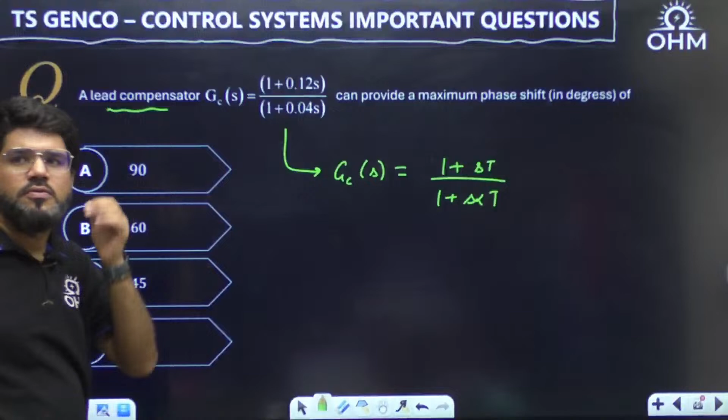Chalo, let's check this. If you compare with (1 + 0.12s)/(1 + 0.04s), you get the value of T. The time constant T is 0.12, and αT is 0.04. What is the value of α? α into 0.12 is 0.04, so α is 4 by 12, hence α is 1/3.

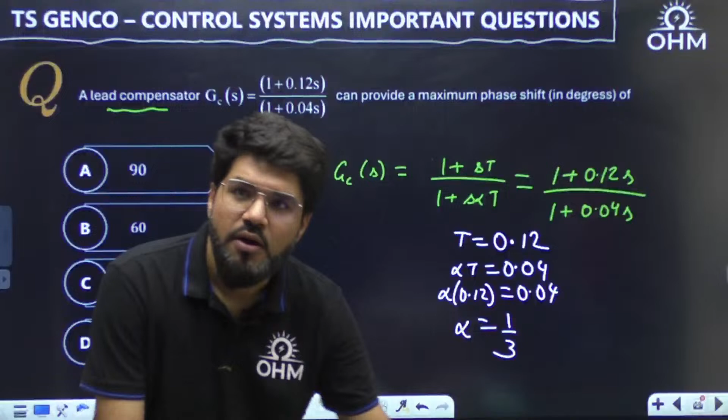Now it will provide maximum phase shift of what? See, how is the phase graph corresponding to the lead compensator? It is approximately of this nature: it increases up to a certain point and then starts decreasing. The frequency at which it provides the maximum possible phase is known as ωm.

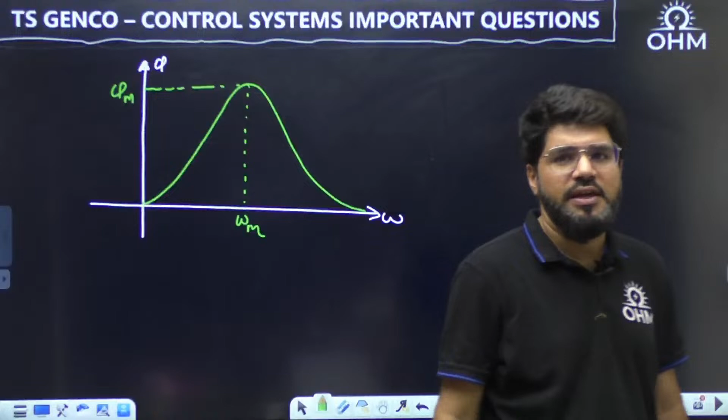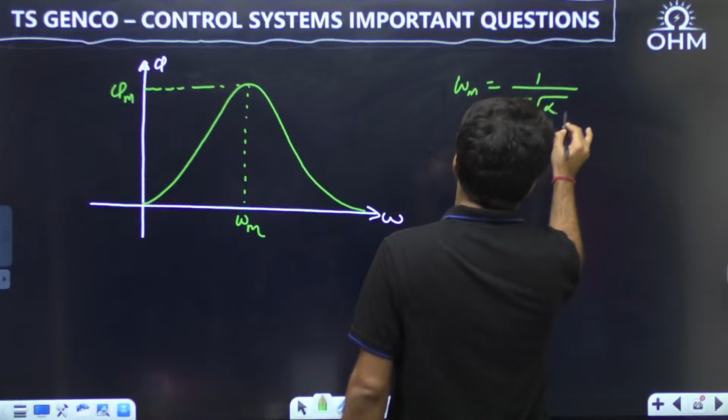And the value of the maximum phase lead provided to improve the phase margin of the system is known as φm. So what is the value of φm? I'll write down both formulas. ωm is given by 1/(T√α), and φm is given by sin⁻¹((1 − α)/(1 + α)).

Sine inverse of 1 minus alpha divided by 1 plus alpha. Okay, so here our question is asking the maximum phase shift. So how much is it going to be? Here it is going to be sine inverse of 1 minus alpha upon 1 plus alpha. Alpha was 1/3, right? So 1 minus 1/3 upon 1 plus 1/3, and this turns out to be sine inverse of 2/3 upon 4/3, 2 by 4, half.

Okay, sine inverse half is 30 degrees. The correct answer is option number D, that is 30 degrees. 1 minus alpha divided by 1 plus alpha.

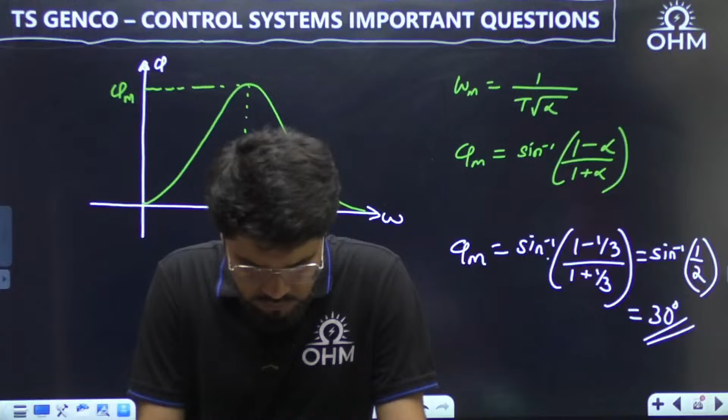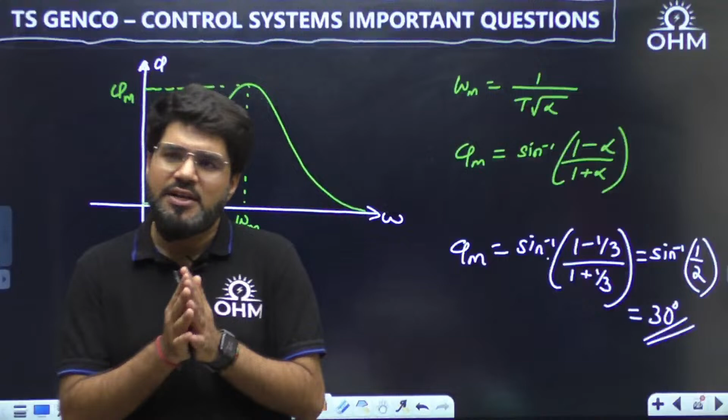Yeah, that is what. Any exam, these are unpredictable. See, anyways, Nyquist, Bode is 100% important. Nyquist, Bode, gain margin, phase margin, 100% important. But state space analysis also they ask. They can ask. So let's create another practice session, part 2, control system part 2.